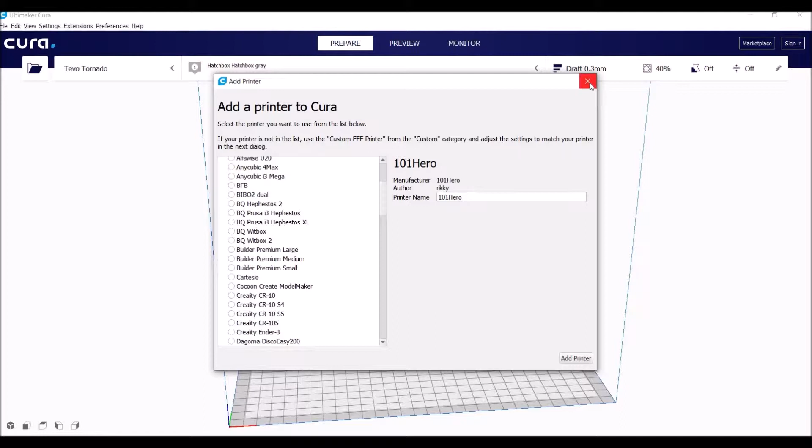You don't need to change any of the other settings. However, once this is added, there's one thing you do have to change. You want to go to Machine Settings. Make sure this is 300 by 300 by 400, 20, 10, 10, 10, and 30.

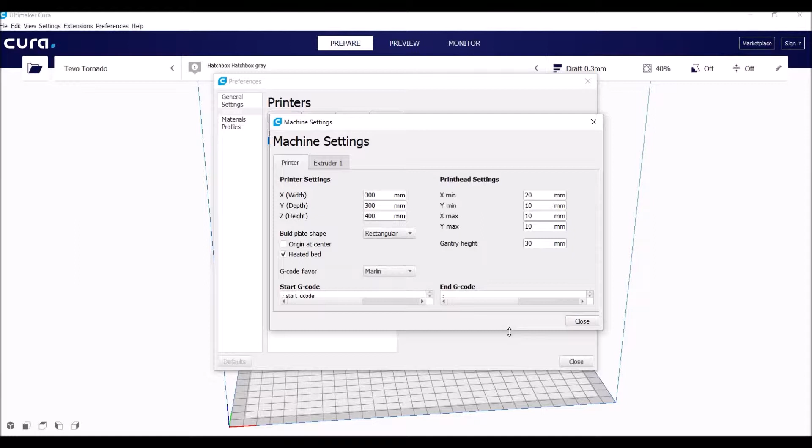Yes, heated bed, don't click this. G-code flavor is Marlin, but what we're interested in is this End G-code.

Yes, and my birds agree with it. Every time they see me pull out the microphone, they know it's time to talk, so they're going to join the conversation, so don't mind them.

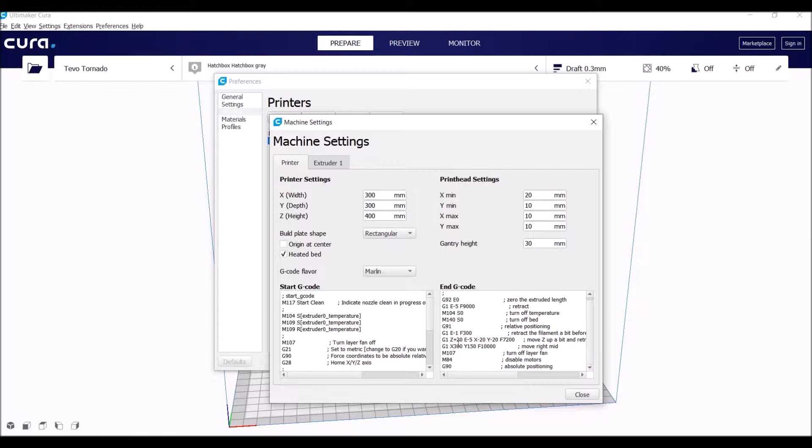The piece that we're interested in changing is this X value. It used to say 320, but I found when it finishes the print and moves the print head or extruder to the far right along the X-axis... it goes along that rail, and then it hits the far end and it grinds because it thinks it needs to go further, but it doesn't.

So I put this at 300. That's all I did, and it stops right at the 300 millimeter mark without freaking out. Okay, so once you have that, you just hit close.

Then for me, what I did is I go to Materials and hit Create New. You can choose a color, the type, and give it a name. This one is going to be Hatchbox Gray because that's the color, and the brand is Hatchbox. Material type.

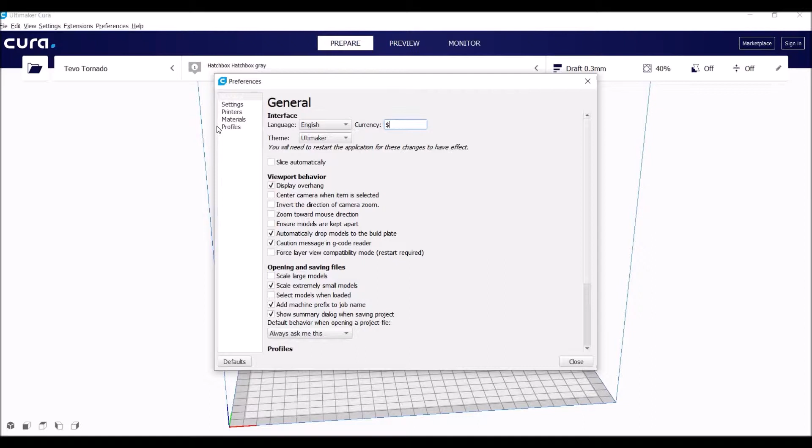Filament cost, this needs to be changed to US. Is that under settings or under general? Currency, underneath general, let's change that to a dollar sign. Okay, perfect, materials, now it's changed. We're good, that's if you're in the States. If you use another currency, be sure to put it in there. It tells you everything you need to know.

So you can pick it, and this is the one I use for my default, and then we're good. So then when you close everything, the screen's going to look like this. You're going to have your 300 by 300 by 400.

Basic print settings are up here: your quality, your infill, a few others.

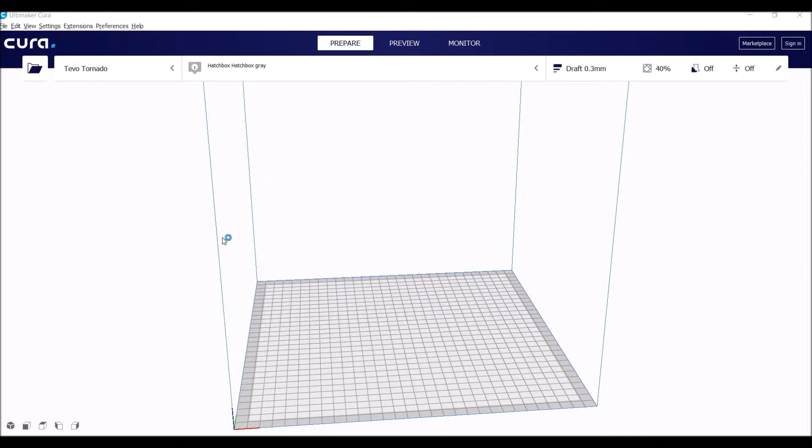Well, let's bring in some objects. So I'm going to go ahead, go to OneDrive, 3D printing, STLs, Tevo Tornado.

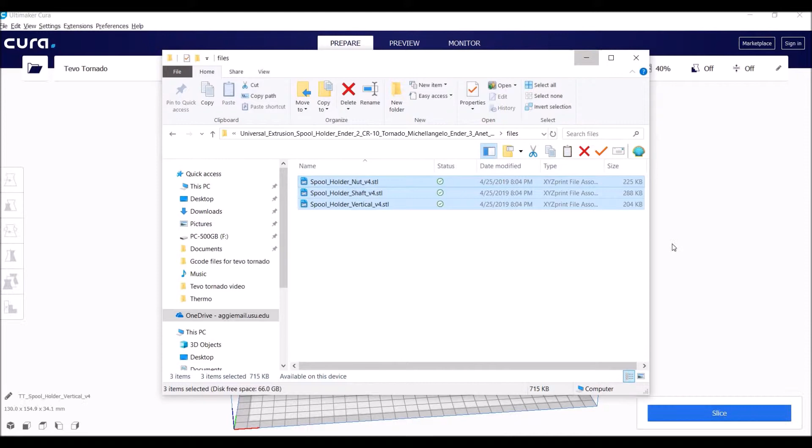Okay, universal. Okay, I'm going to bring in all three of these. You can highlight them all, drag and drop. The person who designed these, I don't know if you can see this, they've cut the edge of this thread off so we don't need supports. That was a smart idea.

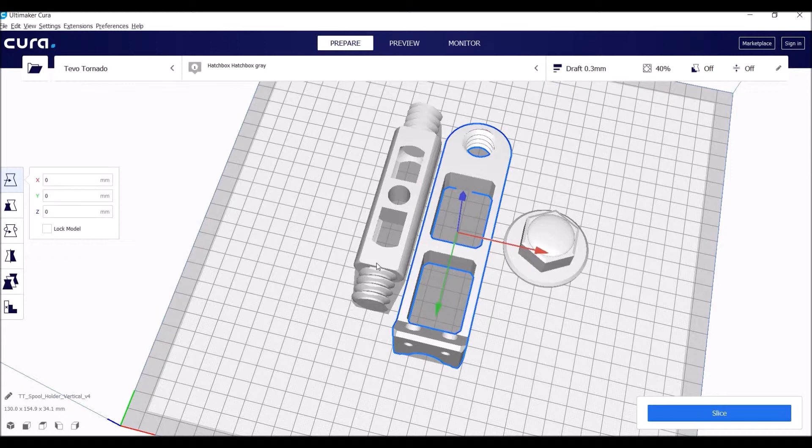So it's going to load your model or models in this. Now it is recommended that this centerpiece right here, this entire center model, has a 40% infill. It could still be on 0.3, it doesn't matter, but they recommend 40% on this, and then the others can be at 25 or 20. So notice that whenever I click on each one, this 40% stays.

I'll show you how to change that for each individual part in just a moment, but let's go over some print properties. So when you first click on this, it's going to bring up bare basics, where it's going to say, here's your layer height, pick what you want, and then your infill percentage, and that's it. It's not going to show what kind of pattern. But if you really want to get into the advanced settings, you go to custom.

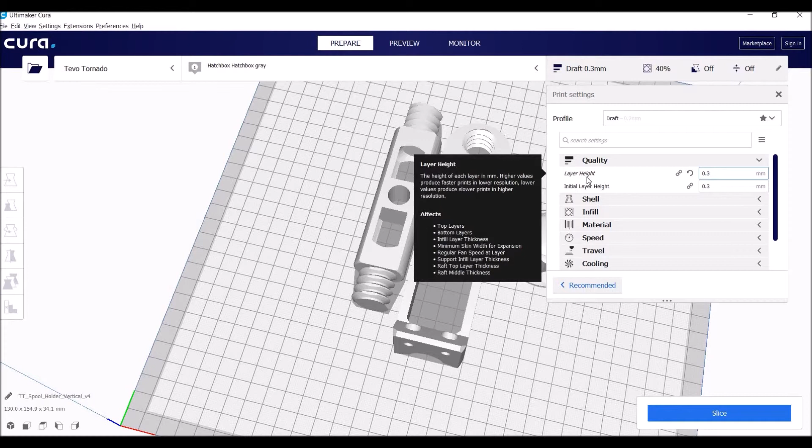This is where you go to quality, and it's going to show at first just layer height. If you want to show more, you hit this little cog, this little gear, and then you select which ones you want it to show. Okay, so I always have it show these two. The others I'll add later on, but right now these two options are fine. So what you're going to want to do is go to infill. Go here, make sure that density and pattern are both selected, and this is where you can change the type.

Okay, so that's all fine and dandy. You can go through here and show all the other ones. I would recommend for initial layer speed at least 15 is really good, 15 to 20, or if you're in a hurry, 30 is fine. But if you notice, if you put 20 in here, it puts this down to 10. It's always half of what you put for print speed by default. So 0.3 prints at 60 millimeters per second.

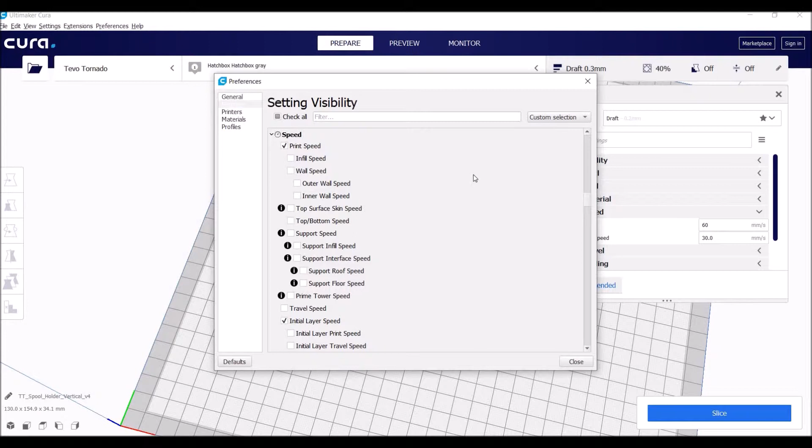Now, if you wanted to control other things, you could totally add these other ones in there. Infill speed. If it's just a concept part, just to show what it's going to look like, and you want to print stupid fast, do infill speed, probably like 100 millimeters a second. I have some really good settings that I used on my other slicer software from my other printer that I could print stupid fast on the inside, but the outside looked really nice. Definitely not accurate to tolerance and whatnot, so don't use it for prototyping, but just concept, it's fine.

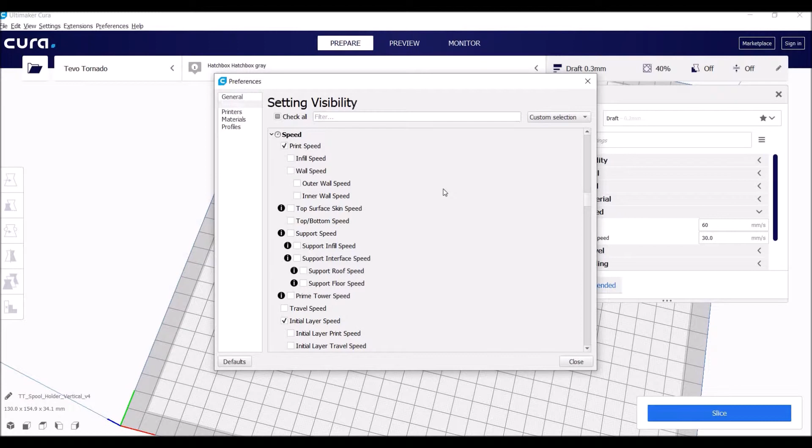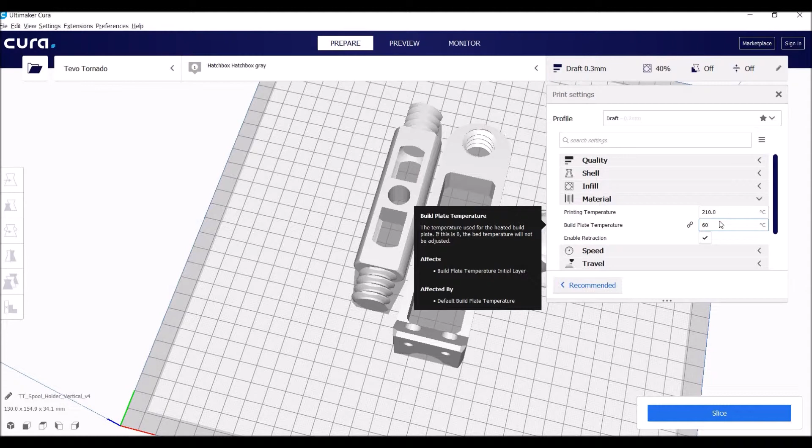Okay, so anyway, I'm just going to leave it at 60-30 for right now. And when you've set what you want, if you go to material, build plate, I always stick it at 60 and 210 here for Utah because of our climate. And right now, it's our wet season, so yeah, those should be fine. Enable retraction, yes sir. Okay, it's all fine and dandy. Now everything is set. If we were to hit slice, everything would be set for this 40%.

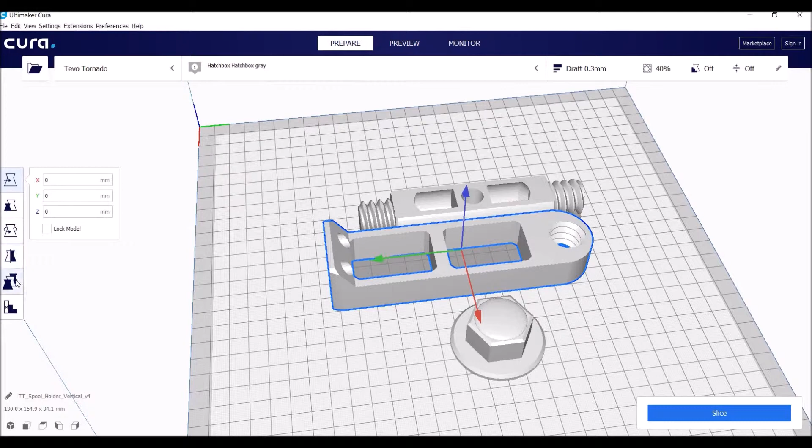Let's do this. If you click on our, don't do this to me. There we go. Click on the model, and if you go to, I gotta find it, right here, per model settings, is the one that has the 3. Yeah, click it. Then you'll go to select settings, keep it under normal model, mesh type. You know what, let's hit close, let's see what mesh type is. Print as support. Don't know these ones yet. I've just barely started using Cura. I've never used it, so let's leave that there.

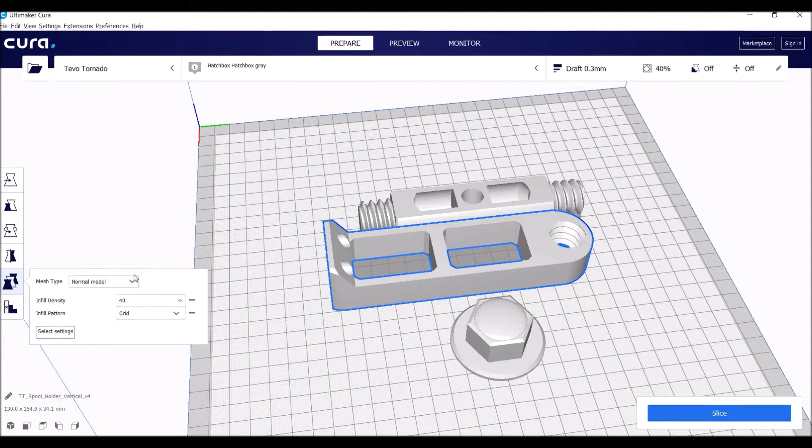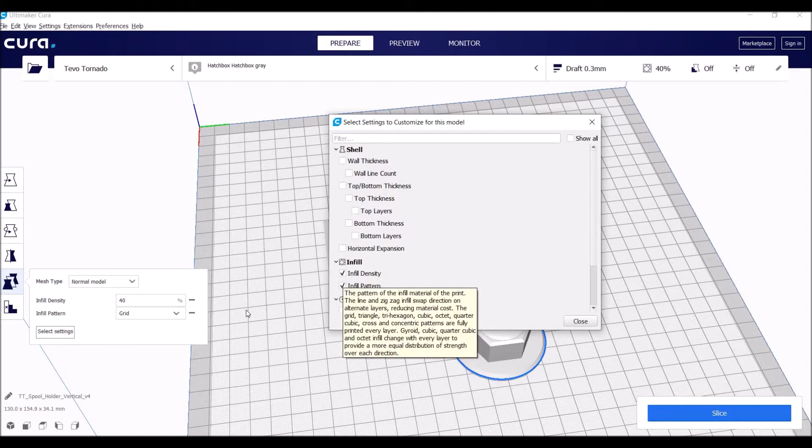So you're gonna want to do infill density and pattern. Okay, so that part, that's fine there. Now we're gonna click on that one, infill density and pattern, and you're gonna hit close. We're gonna type in 20, hit enter, click on this one, select settings, infill and infill pattern, close, go ahead and hit 20, hit enter, go ahead and click off them all. Now if we click on this one, it'll override it.

Still says 40 up here, but that's fine, it's overridden. Click on, man, I don't know what's up with that model. Okay, click on this one, it still says 40 and 20. Okay, so what you're going to want to do is, well, you can do it at any point in time, but I always do it before I slice. You're going to go ahead and hit save.

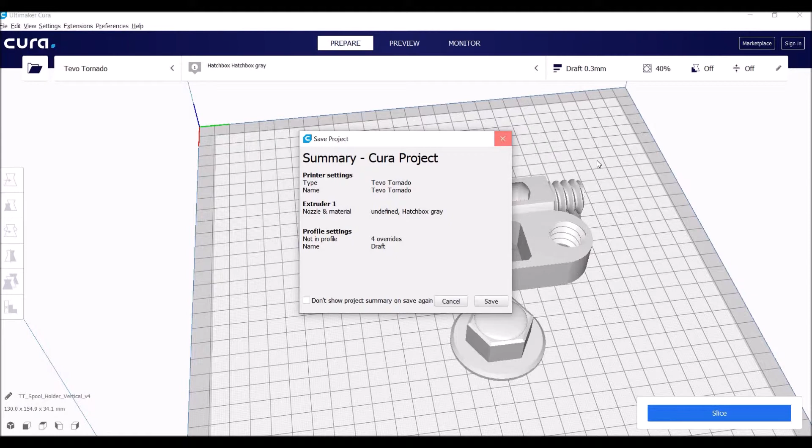And it's going to save it in a .3mf file, which is one that you can always open and check settings in and then re-slice it if need be. I don't know if the Tevo Tornado can read a 3mf file. I know it can just read the G-code.

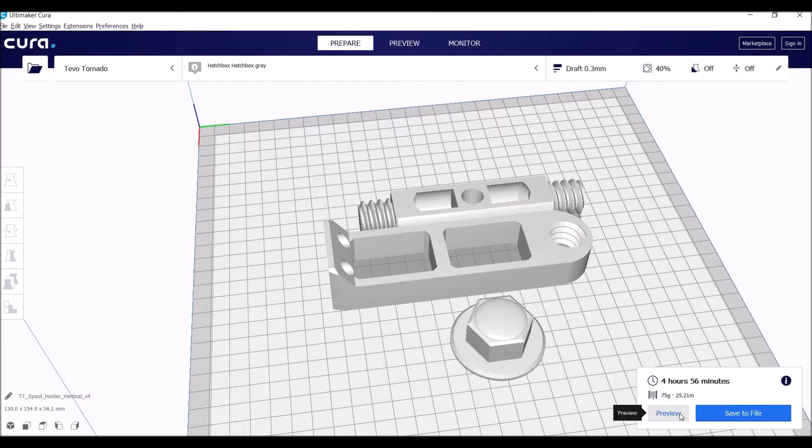Okay, it says 4 hours 56 minutes, 75 grams or 25.21 meters. Man, that's a lot of filament. Holy crap. You're going to hit preview, and we forgot to talk about one thing, and I'll show you here in a second. So you can verify that 20% and 40%.

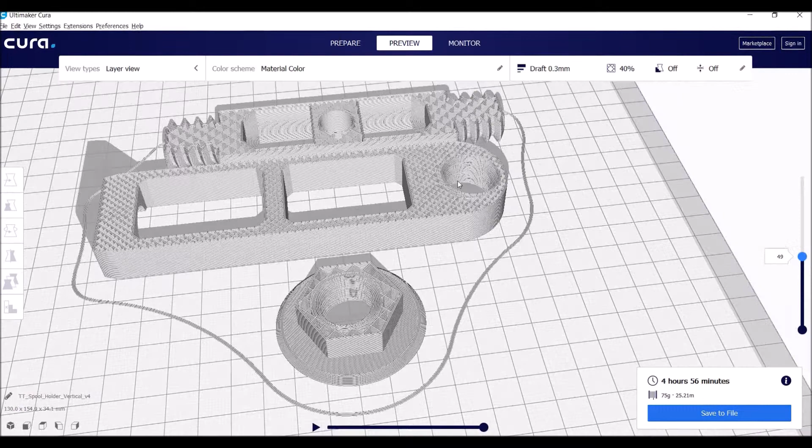So, okay, let's talk a second about this skirt. So, go back into your settings, build plate adhesion, skirt and skirt line count. I always do 3 to 4. And for parts like this, if it's going to be a more accurate part, I'll do probably 5.

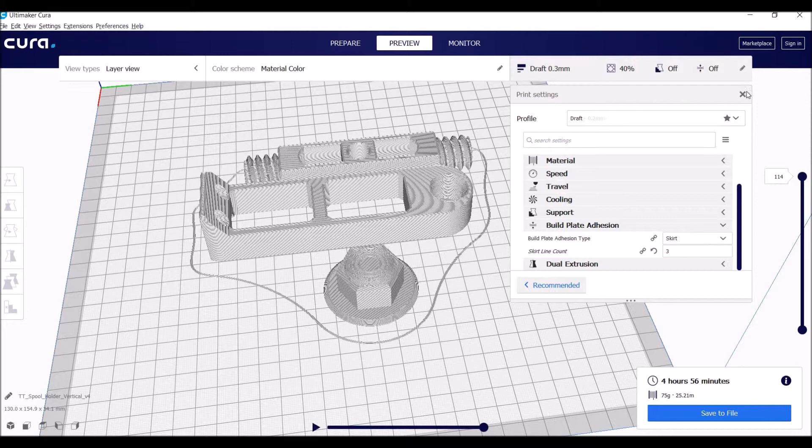And what this does is, this goes around, it primes the nozzle, and it allows you to see if filament's coming out and if any of it's getting too squished and what it looks like. So that way you know the filament is flowing correctly.

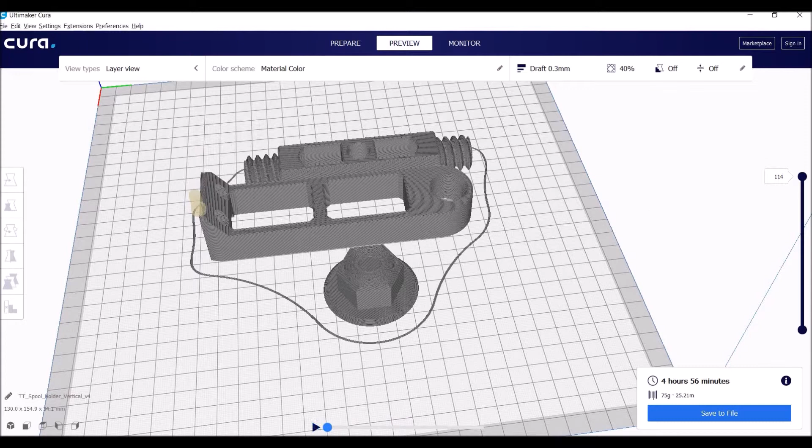Okay, and if you wanted to, if you hit back to here, if we scroll down to, let's say, layer 82, and we rewind this and you hit play, this is the print head, and you'll see it trace in real time, like how long it's going to take. You can see that's the movement speed.

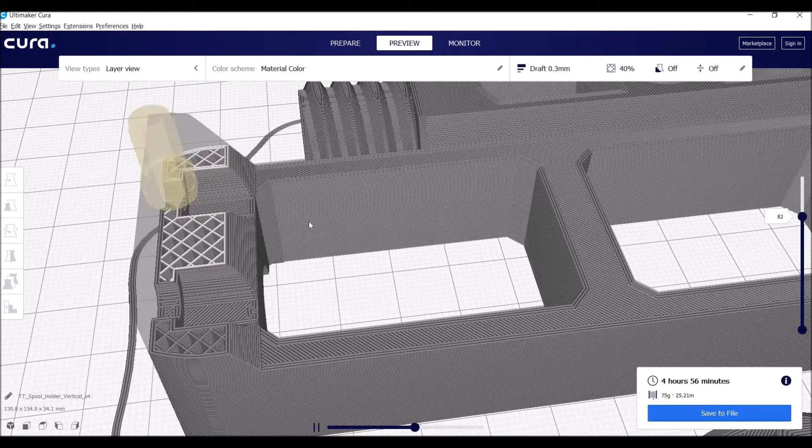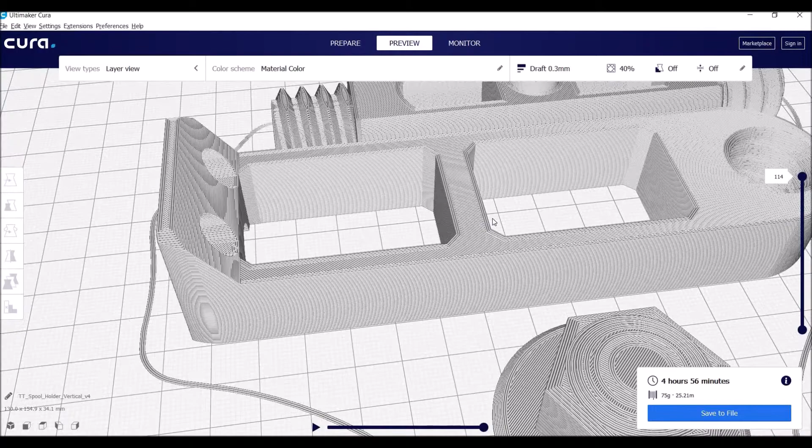If you really wanted to, you'd sit here for the whole 5 hours and watch this thing print layer by layer. It would be boring, but you could do it. So, nifty little feature. Okay, so once it's been sliced, you can make changes, but you just have to hit slice again.

You're just going to hit save to file, and this is going to save the profile name in front of it. Like mine will say TT for Tevo Tornado, and then you just give it a name. See, like right here, TT spool holder vertical. I could hit edit and change it to something else, but I'm not gonna right now. And you hit save, and it's going to ask for a location.

Now, if you have an SD card reader, save it to the SD card that comes with the Tornado or whatever one you're using. Save it onto there, and then all you have to do is remove it from the PC and shove it back into the Tevo, and you're good to go.

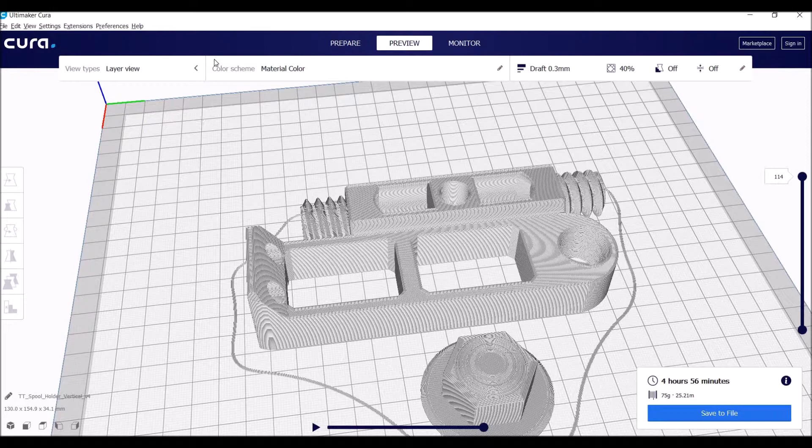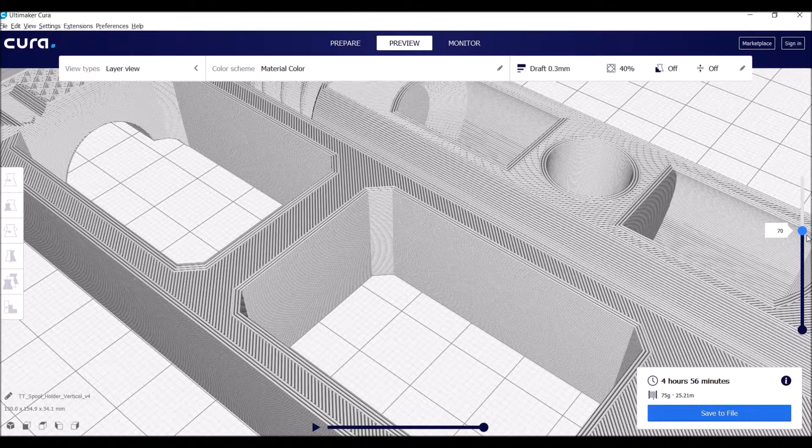So, X-ray view. Ooh, that's nifty. Huh. Okay, so I like layer view. I always have. I like seeing what the inside's gonna look like, you know. It's pretty interesting. Pretty cool.

And if you haven't calibrated it yet using the XYZ calibration cube to where you can get within 2 or 3 decimal places of 20 millimeters, some parts that have threads, like this one, I had to scale to 99%. Oh wait, no, I just barely opened these. I'll scale this one to 99, because if you don't, the tolerances will be way too much for it to index into its proper place.

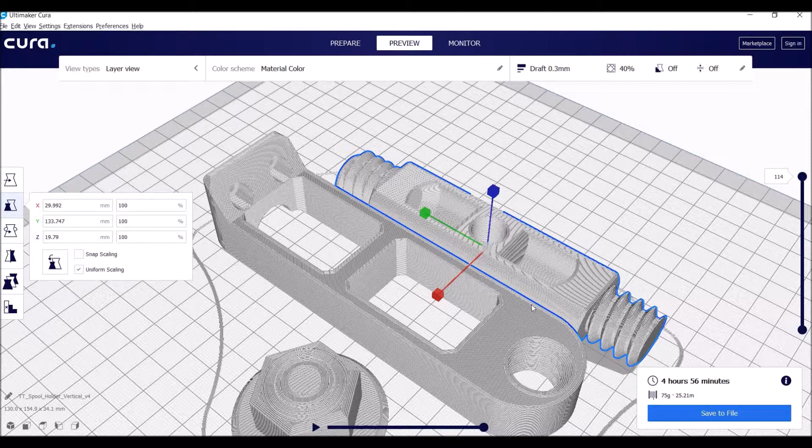Trying to say this in the most appropriate way so I don't get an age restriction on this video.

Okay, so as of right now, those are basic settings of how to get started.